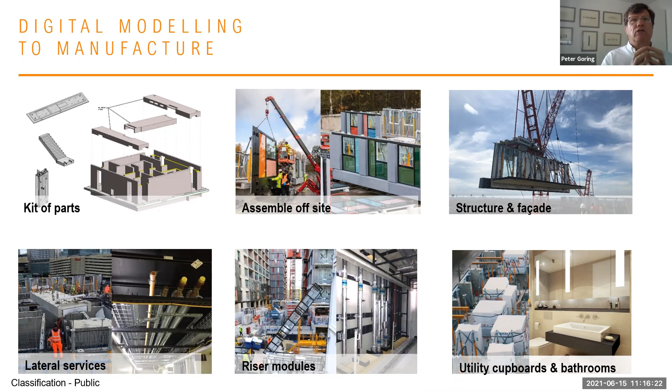So on the next slide, I just want to run through this, how we're doing it. We're actually not having a factory for this. We're actually piggybacking on other people's factories. Many people have invested in some fantastic facilities and spent millions of pounds on it. Our approach is slightly different. We're trying to set up hubs and networks across the country where we use our existing supply chain and work with them to develop.

So what you see here is a precast yard in Norfolk. The precaster owns the yard. They manufacture our materials for us. They put them at the back of the site, underneath the rail. We've actually invested in the crane, so small investment, and we take the units from what we call our supermarket, we bring them forward into a little assembly area, and working from back to front, we bring the precast forward, we put the facade on it, and then we ship it to site.

We have a target date a little bit quicker than that to give us an 18-week benefit.

Our productivity on site is outstanding. Traditionally, you would expect it to be around about £60 per man hour, that's gross value added. We've actually been achieving up to 170 on site. The main reason for that is the amount of resources we've reduced.

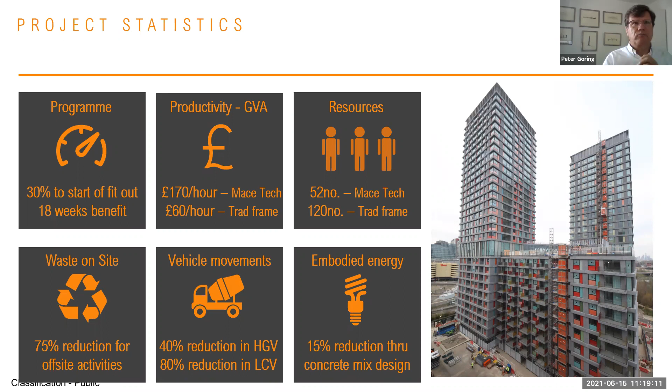So what we've found as we've been delivering these sort of projects over the last 4 to 5 years is that the key to it has been off-site manufacture. But the current demand is moving towards a low carbon environment, and that's certainly taken a lot of an increase in the last 2 to 3 years, in the last year. So on the next slide, I want to look at what we're doing and how we're developing that, and how can we look at addressing the embodied carbon through construction.

So it's a bit of a busy slide, I apologise for that, but effectively, where can we influence?

As Mace, in 2021 we achieved net zero on our activities. Net zero on our activities means the operations on site - the way the tower cranes work, the way the construction site is run. We don't allow diesel generators on our sites anymore, everything is electrically powered. We've managed to cut down from 26,000 tonnes of carbon that we had as a business in 2019.

Reduced it to just under 13,000 last year. We've offset the rest, and we're working hard to try and get to the point where we're minimum carbon on site. Through our clients - what we call our clients' carbon, the client's designs - there's about 150,000 tonnes of carbon.

We've set targets to reduce that 10% year on year, and we can do that by looking at the design in different stages. The earlier we get involved, the more we can influence. And the more we can look at our processes, the more we can influence it as well.

So on the next slide, I just want to show what we're doing with materiality alone.

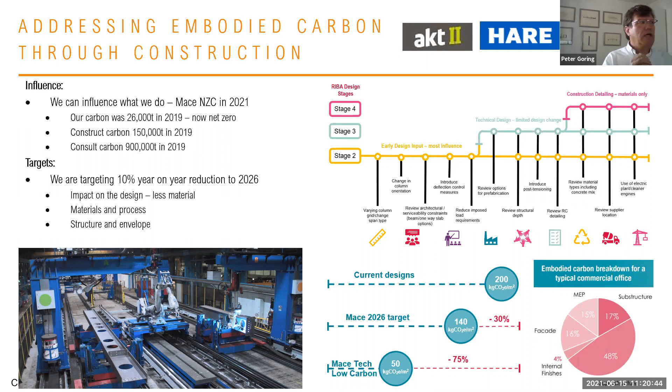If we can reduce the cement content straight away - in concrete terms, I could talk about concrete for hours, I won't do that - we can actually take the cement out of the concrete. The load cycle means it's less critical on the turnaround time, and therefore we can start to make good inroads into it.

On steel production, there are two types of steel. The basic oxygen furnace has 80% more embodied carbon in it than the electric arc furnace steel. So if we can target higher strength steel to be more effective, and design not just for load but more for deflection, vibration, and now carbon, we can get a much lower carbon structure.

So effectively, what we're trying to do as a business - we've identified that in a structure, in the structural floor plate, there's around 200 kgs of CO2 per square metre. We're targeting 10% year on year, so we're hoping to get that down to about 140 by 2026.

We've also developed, with funding from Innovate UK, with Cemfree and Oranmore Precast amongst the partners, as well as Hare and AKT II, a method of doing off-site cassettes, which is what you see in the foreground there. What we've tried to do here is get low cement carbon, which can actually achieve the same as an ordinary concrete structure.

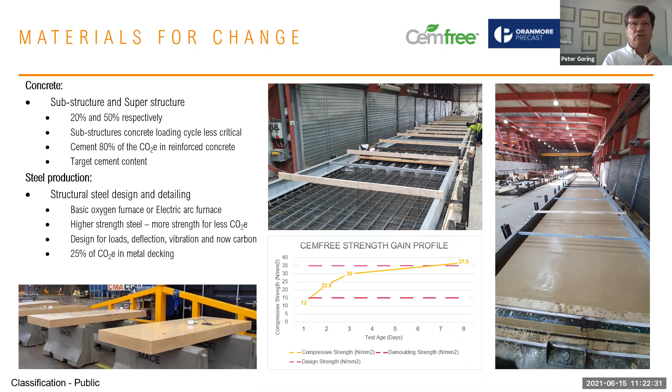We've reduced the carbon on this from 200 down to just over 50. So already we're taking 75% of the carbon out of the superstructure plates and moving to a different low carbon situation. So the idea behind all of this is, how do we actually achieve this with a view to taking the carbon down into a very low building, and convincing the clients we're doing the right sort of thing.

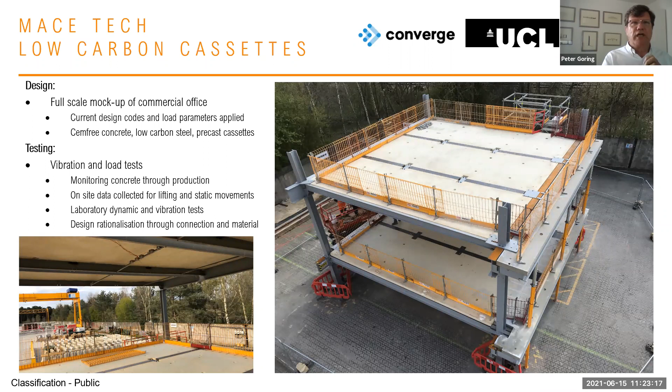So just one last slide from me is how we take this change from being an idea right the way through to commercially available. Effectively, where we are with the Innovate UK project, we're doing the factory tests and the proof of concept. The next steps will be whole project tests.

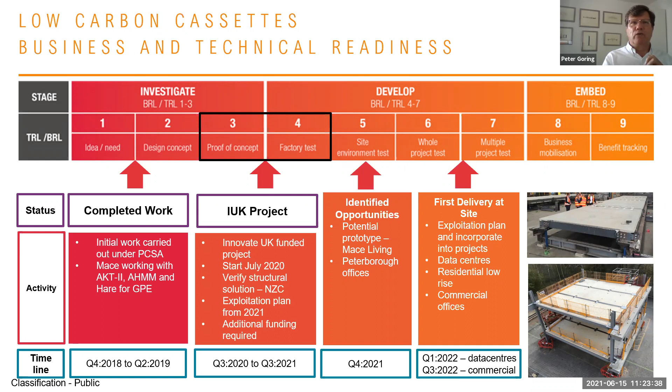This is the area that Yewande mentioned earlier about how you can actually lose a bit of margin on this, because our margin's really low. But once we've dealt with all this, we can then move on and roll it out to the business. So it's a really exciting time, as Yewande mentioned, and I'll hand you back to her for the next speaker.

So the HIPER Pile is an amalgamation of individual innovations which, when combined, offer unprecedented savings in embodied and emitted carbon, an improvement in quality, an improvement in safety, and provides the innovation to reduce material volume and waste, as well as speeding the overall construction programme. It's worth noting that not all elements have to be adopted, and a number of these innovations can be delivered in isolation. The product is subject to 5 patents pending, and we also exclusively license the HIPER Pile IP from City University of London. So what does the HIPER Pile stand for?

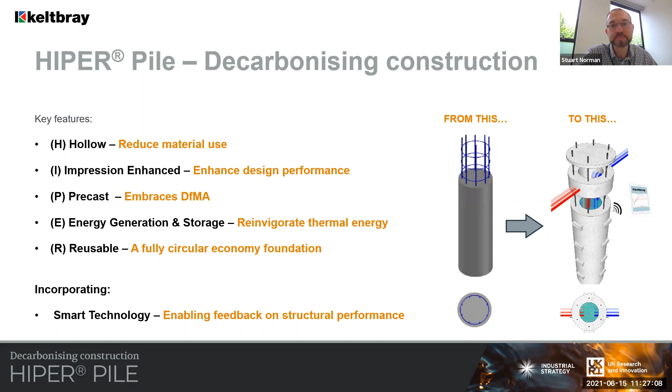So the hollow and the reusable elements tend to go hand in hand, but primarily the hollow pile can either be a cast in situ or a precast foundation, which we'll come to shortly. For the cast in situ version, you can see in the middle picture, we use a very thin steel liner to form the void, with a 200mm concrete annulus formed around the outside.

Why do we do this? Well, obviously to save material volume and carbon, but it's really to better match the geotechnical and the structural performance of the piles that we install. Typically, piles have nowhere near the structural stress that they're designed for because of limitations due to the geotechnical performance. So this provides us with between a 30 and 70% concrete saving by volume, depending on the diameter that we're comparing it against.

Larger diameters do give greater savings. Where we're moving with this is that we're aiming to adopt large diameter monopiles, so try to move away from multiple pile caps so that we can eliminate the pile cap construction and also the embodied carbon associated with the pile cap as well. The void itself permits inspection during operation so that we can warrant and reuse the pile for the next occupants.

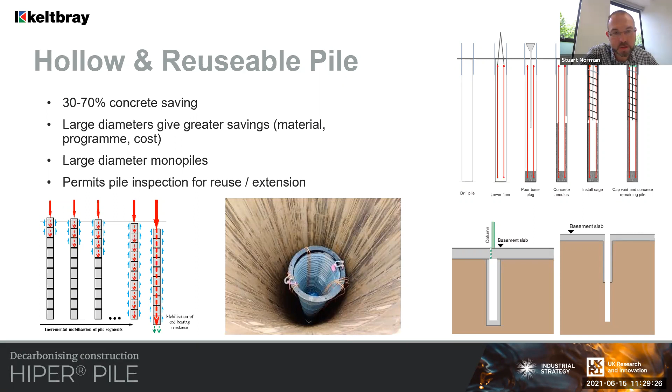The hollow pile also has an added benefit in that we're better able to match the stiffness of the pile to the stiffness of the ground. What does that mean? That means we're better able to further improve the shaft friction performance of this hollow pile element. Next slide, please.

So the impression pile element. If you take yourselves back to your childhoods, playing with a lump of clay in a clay pot, you put your thumb in and you just displace the clay and form a nice little impression.

Effectively that's what we're doing in those bottom right hand photos. We are remodeling the clay to give enhanced shaft friction. How do we do that? We're effectively moving the interface away from a concrete-to-soil interface to a soil-to-soil interface, and by doing that we enhance shaft friction by between 30 and 40%.

What does that mean for the layman? It means that wherever we design a 750mm diameter pile, it's more often performing as a 930mm diameter pile, but without the material and embodied carbon that goes with that. So we're able to reduce material volume by around 15%, and sometimes, depending on ground conditions, we're also able to avoid going into water-bearing strata, which adds significant time and cost.

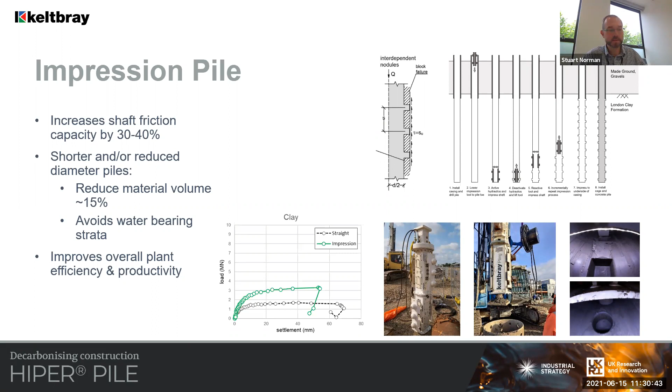So the precast pile embraces DfMA in deep foundations. There's a little snippet there of the design of the element, overall to improve construction quality. The main element is that rather than breaking piles down to their final cutoff level, we are intending on building them up to the final cutoff level.

So a bit like a Lego block, really. What does this do? It certainly improves health and safety because we are able to eliminate HAVS from the pile trimming works. The connection to the ground is formed through grouting of the thin annulus between the precast element and the ground itself.

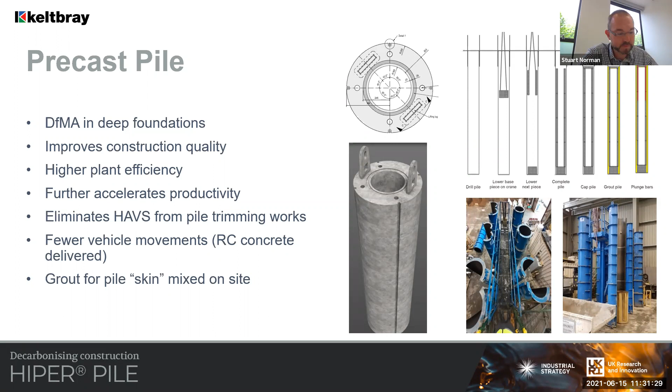So the energy pile: basically we're able to incorporate significantly higher thermal efficiencies because concrete is a poor conductor of heat, whereas water is a much better conductor of heat. So we fill the void with water and we're better able to provide much greater enhanced thermal performance.

We also solve a particular problem in that the majority of ground source heat loops are damaged during pile breakdown. So we completely avoid this by separating the piling construction activity from the thermal construction activity itself, thereby also improving overall productivity.

I won't labour this point too much, but we've done an analysis here: are net zero deep pile foundations realistic? If we allow 100% for what we do day to day, we've analysed a 900mm diameter pile in green and a 2.4 metre diameter pile in red. If we just replace a solid pile with either cement-free concrete or earth-friendly concrete, we're able to offer a 45% saving. As we introduce each element of the HIPER pile, we eventually get to either an 85% saving in embodied carbon or a 94% saving in embodied carbon.

Once we add in the operational savings associated with the use of the pile for thermal energy, which offers a coefficient of performance of 500%, it could conceivably be given that we are actually producing a carbon negative foundation, a first for the UK.

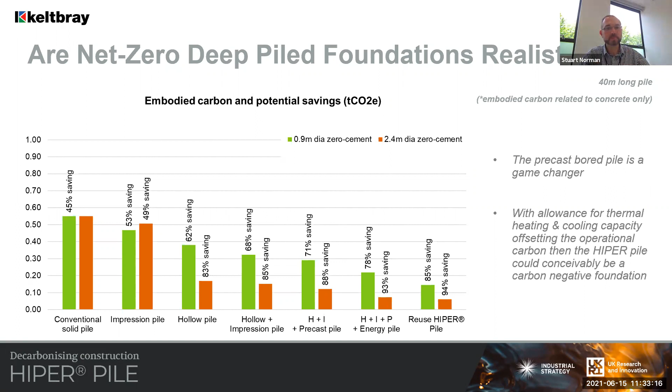So there's a summary of the benefits there. I'm running a little bit over time, so I won't run through those in any detail, but there are a number of indirect benefits associated as well as the direct benefits I've spoken about today, and I'd be pleased to field some questions much later on down the line. Thank you all for your attention.

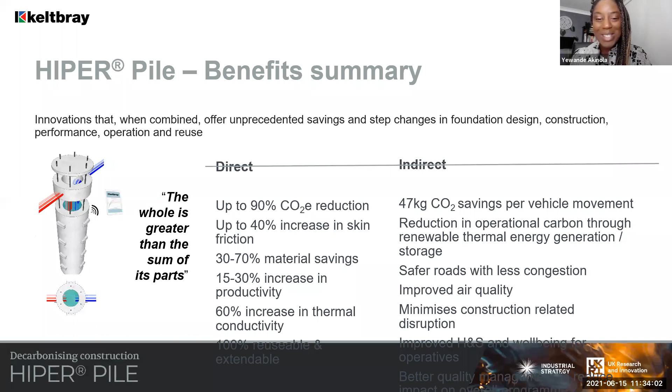It's a pleasure to introduce Ian Naylor. Ian, have we got you on? Hello, yep, here I am. Oh yes, fantastic, brilliant, nice to see you.

Ian is a chartered architect. He's also the lead of design research at DFE. He specializes in school building design and has worked on academies, free schools, PSBP, and the new school rebuilding program. He's currently the lead of the design research units in DFE, developing and ensuring standards of construction are set and met. His team has been meeting the challenge of climate change with a wide range of projects, including GenZero.

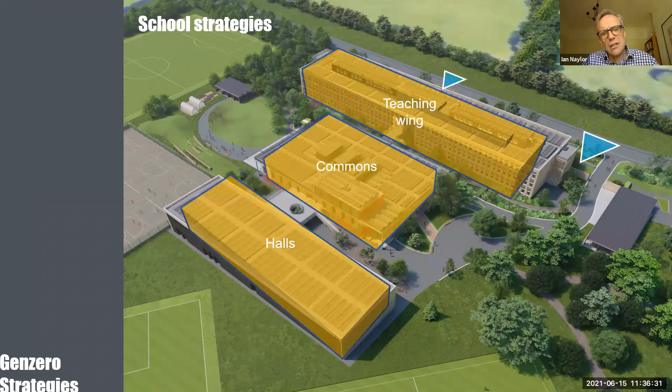So what have we done? We're looking at a secondary school - this is one of two models that we've created. You can see that we split the school into three parts, around two elements. One is around the type of spaces that go into each one - halls being very large spaces, and teaching rooms being classic cellular spaces. The commons is the sort of pastoral support, dining rooms, IT spaces and libraries in the middle.

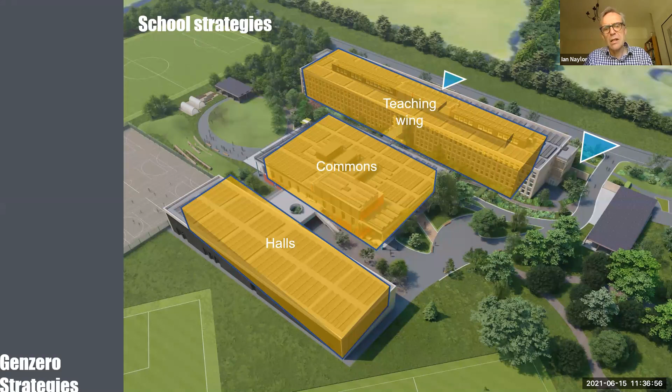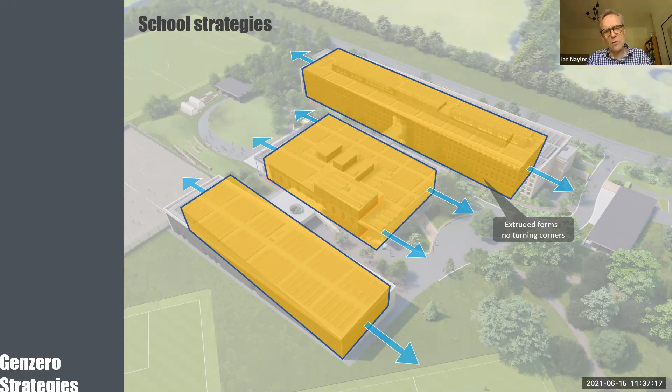We've got lots of different elements of why this is so good, but one of the things this does is it allows crossflow ventilation, which is captured in our new specification for schools S21, and it's critical to the way that we heat scavenge and energy scavenge later on in the design.

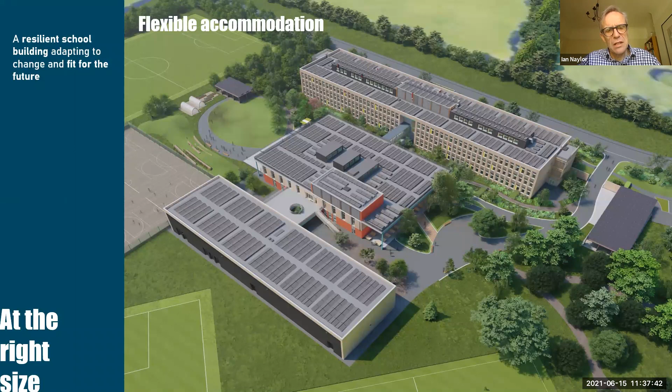Right, the standardization piece. What we've done is we've split the building - you can see green halls, orange are cellular teaching spaces, and the grey is the support spaces.

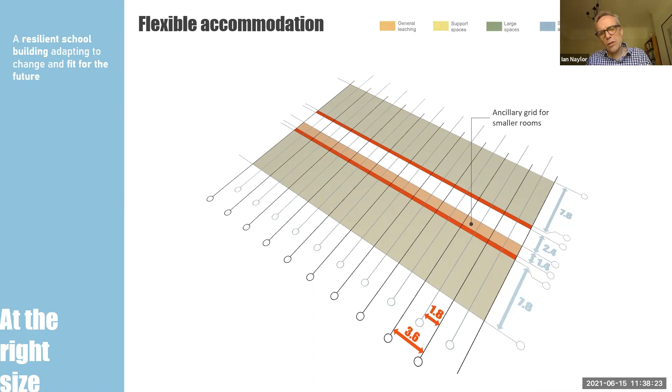This is a little click sequence of slides. You can see we've set the building up around a standard grid - just looking at this little grey bit, it's around a 3.6 grid, common to both the panelised system. It's a classic old 3.6 and 7.2 classical grid for steelwork, but it's at core as well. It fits around volumetric, and this building concentrates on both a combined panelised and volumetric solution - panelised for the simple spaces and volumetric for the spaces that we want to fit out very much off site. There's an ancillary grid for small rooms.

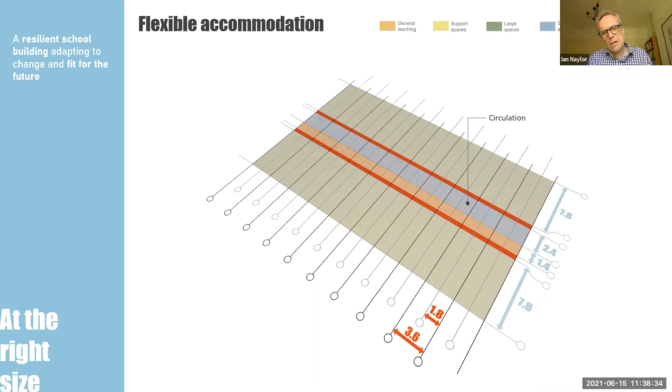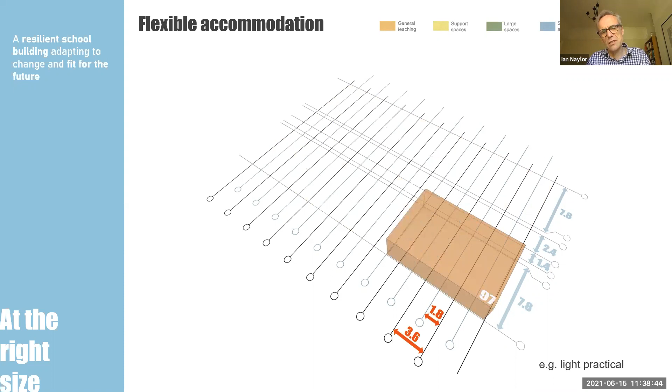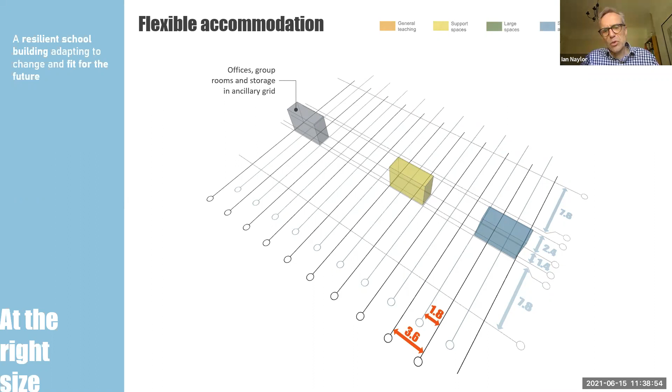Circulation is at 2.4 in line with the new S21. We've allowed ourselves in that ancillary grid to form voids for cross-vent - 55 for a standard classroom, 69 for an IT room, 83 for a laboratory, 97 and 111 for those big specialist spaces. That ancillary grid works really hard for support spaces, offices, and so on, and to provide that ventilation through the building.

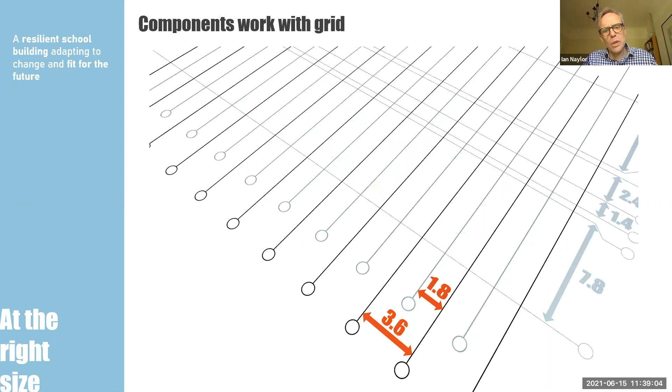There you can see it blocked out as a standard block and blocked out as a DT suite as well. Let's just watch the way this builds up. What we're really proud about there - you can just see the composite concrete and timber panels coming in for the floors. This is a CLT fabricated external panel structurally.

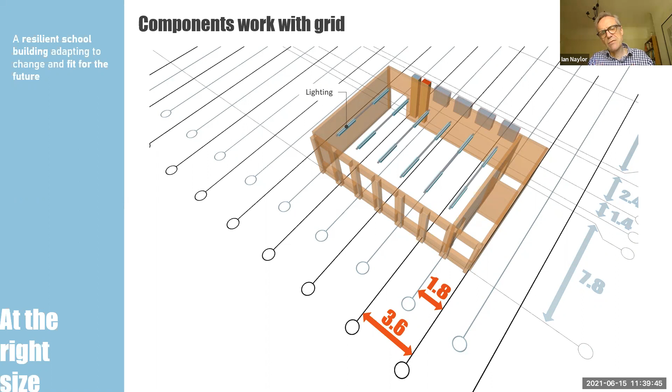You can see that the cross walls, because we've used a line loaded system, can fit anywhere onto that 1.8 grid - that's how we get a classroom or a laboratory. We've created a service spine, really unique - we've shifted away from organising our structures into a volumetrically almost pre-constructed element for services in that vertical element. Even the lighting fits on the grid, so we can dissect these spaces very simply.

That gives you a sense of yellow being the panelised elements of the building, red being volumetric plant rooms, volumetric kitchens, volumetric toilets, and staircases of pre-assembled elements. Next slide, please.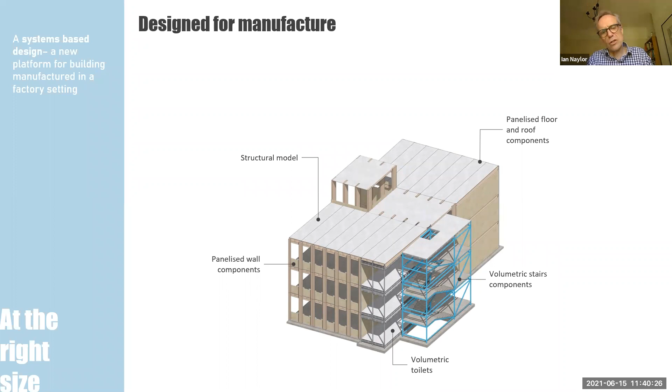And timber, CLT, and glue laminated structure. This shows that the structure is largely timber. You can see the volumetric panels, which come in red, volumetric units coming in red. So here we are, we'll disassemble this and watch the way it goes in. There are those composite floor panels we're really proud of, and there's a volumetric unit coming in and being clad.

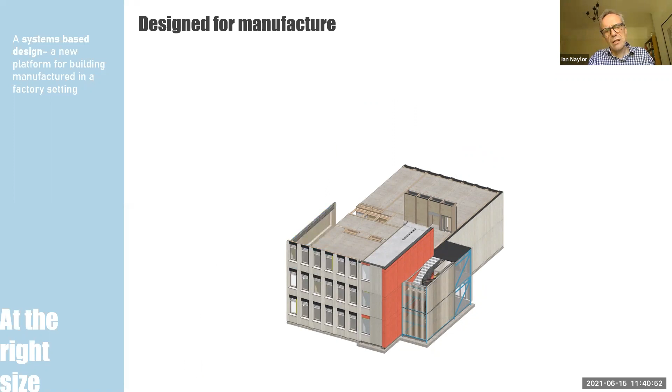There's the service spine coming in, pre-assembled and fitted out. The external wall coming in as a structural system with its windows, and then the capping pieces going on afterwards. The walls going in with their dado and frieze already on, roof going in, finished on site. You'll see the PV panels dropping in.

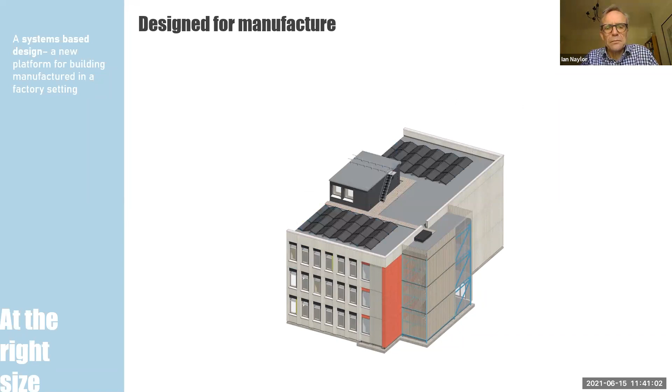Keep going. And then the furniture, all designed in a moment. You'll see the furniture going into the building. We've moved away from fixed furniture to loose furniture just about everywhere in the building. And you'll see, there we are.

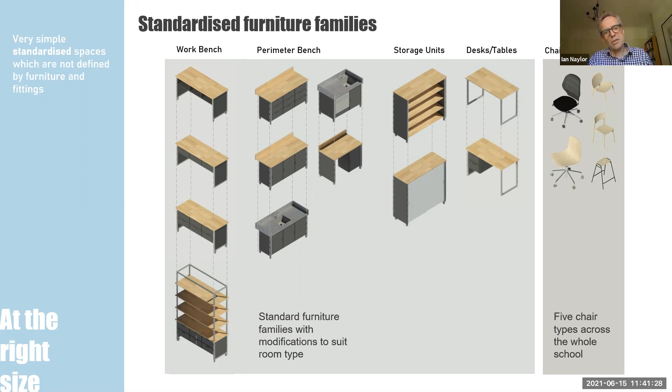We set the furniture up as a series of families. It's virtually largely on wheels, except for the tables, and even the sink units are plugged in, not scribed and fitted to the building. We've managed to get chairs down to just 5 types in the building - a real achievement, great success. Next slide, please.

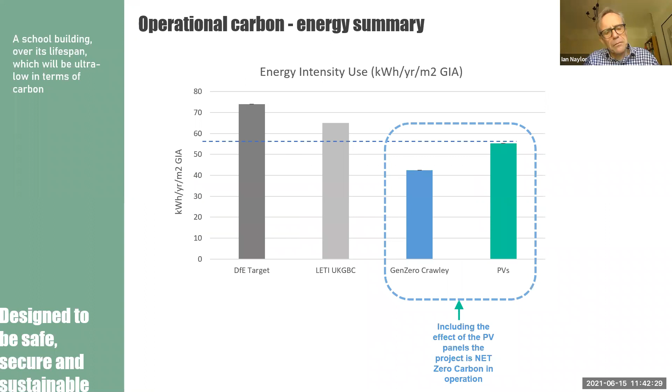Here we are on operational carbon, and you can see the various targets. You can see where we achieve GenZero on our Crawley site in blue, and the output of our PVs across an annualized period - we're comfortably net zero on operational carbon. Thank you. Next slide, please.

And I said I'd talk very briefly about what makes a great building. You can see one thing we struck early on: a CLT manufactured halls block, all uniform spaces. We've made them all spanned with glue laminated timber, but without a frame - it's a box structure in its own right. Next slide, please.

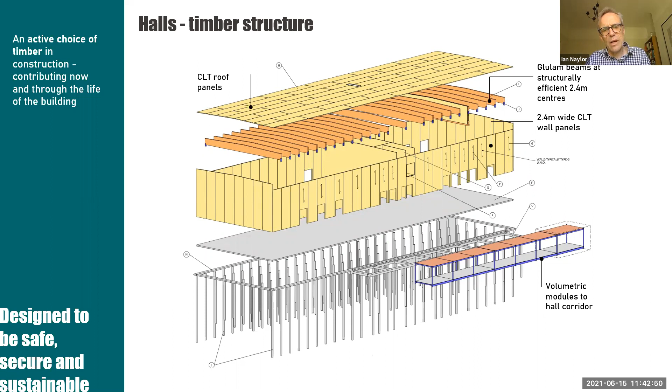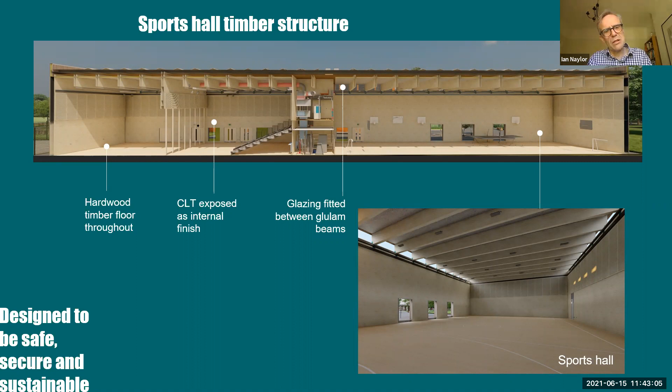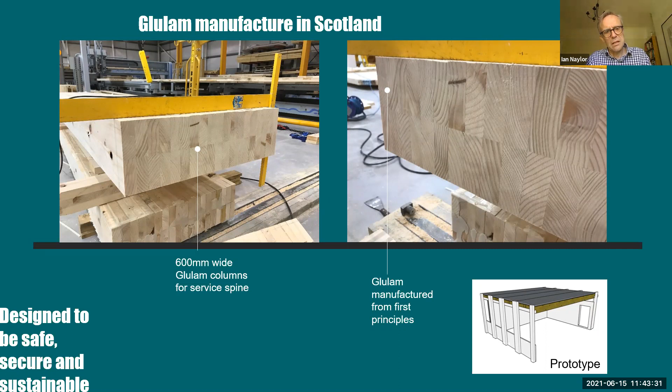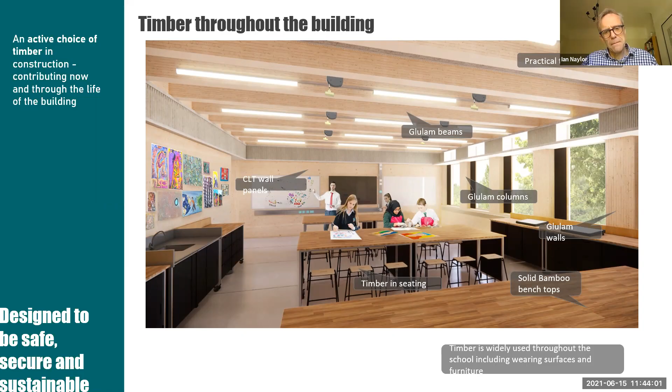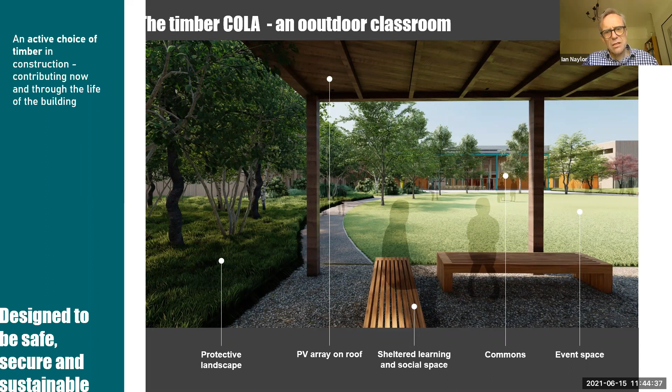Outdoor classrooms. We've got a PV array on most of the building, including on the outdoor classrooms and on the bin stores, which I think is another great achievement. Outdoor classrooms, even those constructed in timber - this is about embracing a whole life position.

The final slide, hopefully. Thank you very much.

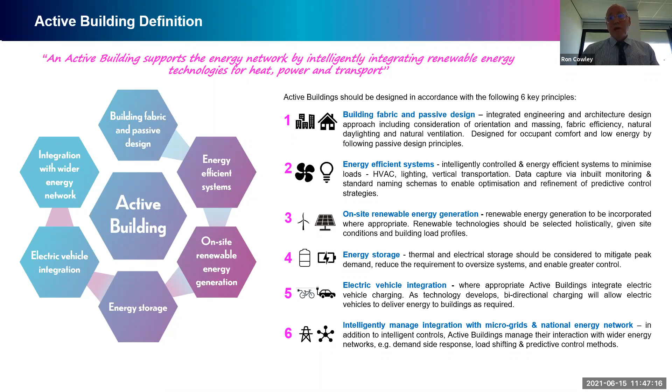So a home is a power station, ultimately. And what is net carbon zero? Net carbon zero for me is when we can provide the heat and energy that satisfies the occupancy demands whilst being disconnected from the mains electricity and gas. That's ultimately what operational net carbon zero is - when we can disconnect the home from the mains, electric and gas.

However, the main problem is, how do we get our building through the winter months? There's an awful lot of energy available in the summer months to generate power and to store that. And how do we store that energy and release it through winter? So that's the key - one of the key strategies of the Active Building Centre is to demonstrate how we can balance the heat and energy load interseasonally. We call this interseasonal heat and energy balance.

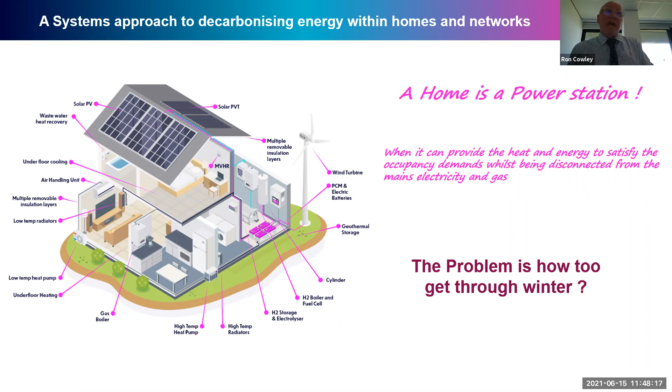Okay, so for me, the compelling part of an active building is - do you put food on somebody's table, or do you put energy in the meter? The net carbon zero challenge identifies the key thing - there's a lot of fuel poverty out there, and people can't afford to eat or run the home as well. So having buildings that can generate an income for the occupancy is a great thing. So, the Active Building Centre - what are we?

We are a centre of excellence whose mission is to promote the improved understanding and increased commercialisation of low carbon construction and renewable technologies for energy capture, storage, integration and distribution within and between buildings through adapting, adopting, improving and developing cutting edge technologies which simply connect, control and integrate building energy solutions within intelligent network systems. So ABC's aim is to revolutionize the way in which buildings are powered and heated to accelerate the UK's drive towards net carbon zero.

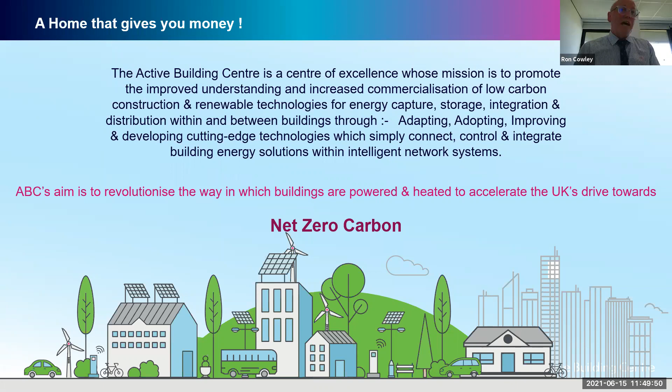So the 3 C's, I call it: we capture and store energy, we connect all the elements together and control it, and we configure it.

Part of an active building is to connect all the elements together, and we look at the energy systems, connect them together with the occupancy, a product selector, and create a digital twin of the building and the community so we can learn from how the building works with the occupancy in the building fabric to optimize the energy flows.

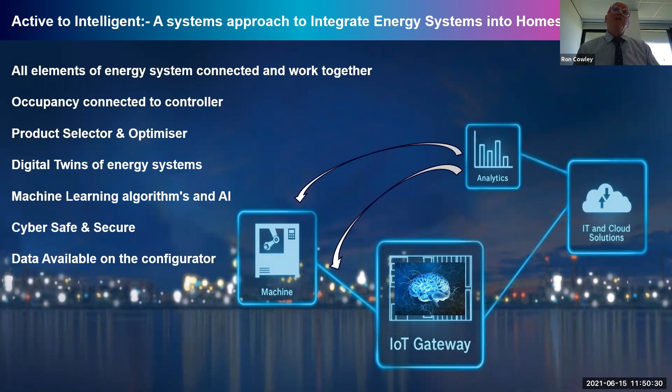And finally, we are producing a configurator, giving this information to everybody who wishes to know how to have a journey to net carbon zero in a building or community through actual worked examples. Thank you very much.

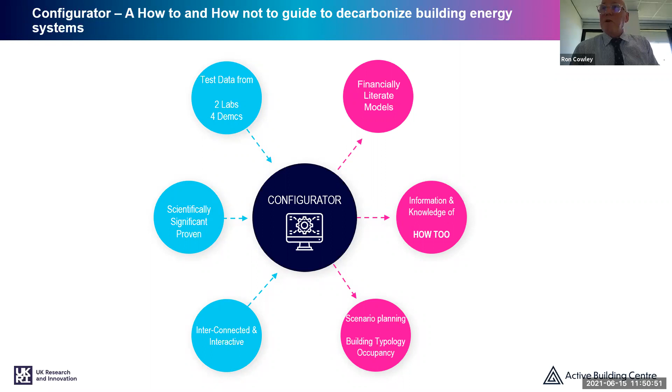Thank you very much, Ron, for that. Really useful. I'm looking at that configurator and thinking that would be extremely instrumental in our industry. Very, very important. It's the key. It's very, very important. Yes.

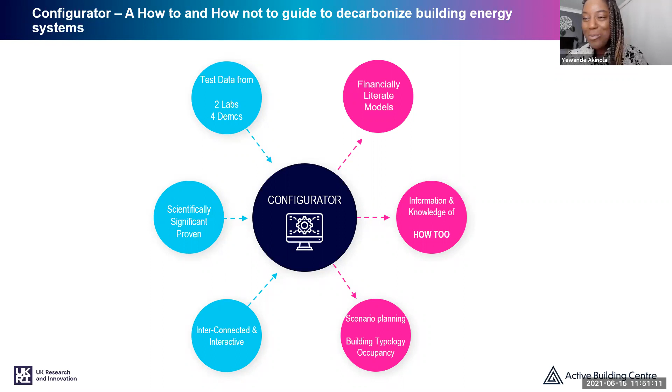It's a real pleasure to introduce Ian Hutchcroft. I can see him. Oh, fantastic. He's on my screen now. Brilliant. Ian is part of the Energiesprong team adapting the Dutch developed approach for the UK market, working closely with teams all over the world. And the approach, I'm sure we'll hear about it, but it's really an approach to deliver zero carbon retrofit and new build homes. Thank you very much, Ian, for joining us. Thank you very much. Thank you.

Energiesprong means energy leap in Dutch. It's the name given to the Dutch government strategy for delivering zero carbon homes, particularly retrofits, but also it works for new build. It's a strategy for delivering zero carbon retrofit of existing housing stocks at scale, quickly.

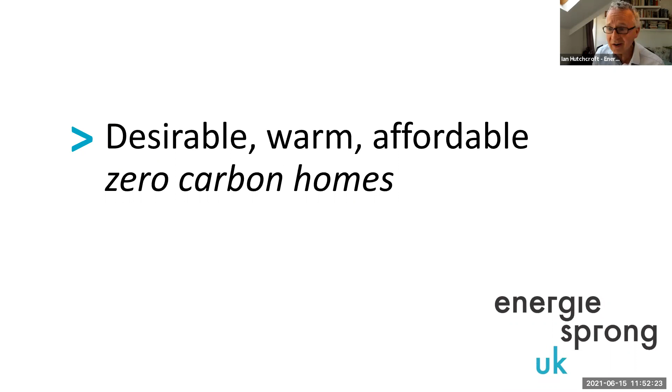Our role in Energiesprong UK is to take that successful Dutch experience and translate it into the UK market, which we've done, demonstrate that it works, which we've done, and scale up a market and an industry to deliver this, which we are in the course of doing. We're 100% publicly funded. We're not delivering retrofit, we're a catalyst organisation, market development organisation, funded by EU, UK and UK local government sources.

So let's recap. We've got a big job here. We have 27 million homes, and they all have to be zero carbon within the next decade or two. The retrofit we've done to date isn't the way we're going to achieve that goal in the future. There are things missing: we don't have a business model for doing home retrofit by and large, we don't have a way of financing retrofit, the cost is too high at the moment to get to zero carbon, and demand—well, who really wants this done to their homes? Scale is a real issue; being able to deliver thousands of retrofits daily across the UK is a challenge currently. And there is a performance gap between the design and modelled approach and what it actually performs in the real world.

The Energiesprong approach recognises that we need a whole house approach, as many people do, but we also need a whole system strategy to get this done. The Energiesprong strategy provides a business model to finance the cost of the works from savings. It reduces cost through industrialisation and aggregating demand, scaling up volume through economies of scale. It produces homes that are a joy to live in, that look great, on a really simple offer to homeowners. It answers the demand issue. By using industrialisation and aggregating that demand, this is deliverable at scale, and it answers the performance gap by requiring verified monitoring of actual performance every day, every year, with that performance guaranteed by the solution provider that has delivered the work.

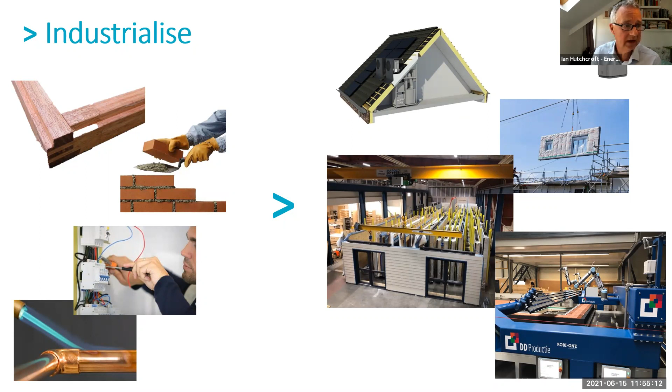The second important element of the Energiesprong strategy is the business case that pays for it. We're using social housing as the launching market—it's big enough to bring scale on which an industry can evolve around supplying. In the traditional social housing context, the resident pays the landlord their rent, and they pay their utility company their energy bill. In the Energiesprong world, they still pay rent, but they pay an additional charge, a proportion of what was their energy bill, but is now an energy bill saving.

A proportion of that is paid to their landlord as a comfort plan charge. The resident receives guaranteed comfort for a guaranteed low total price, less than they were paying before. There's still a residual electricity bill, electric only, no gas, and that goes to the utility. The resident can still switch as before, but that additional income is used by the landlord together with savings from their planned maintenance programme to finance a business model that pays for the capital cost over the long term.

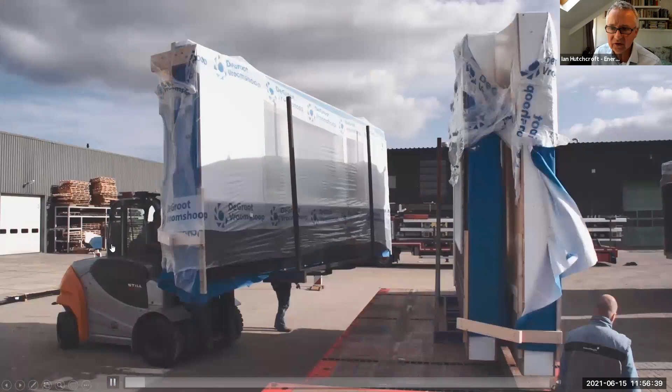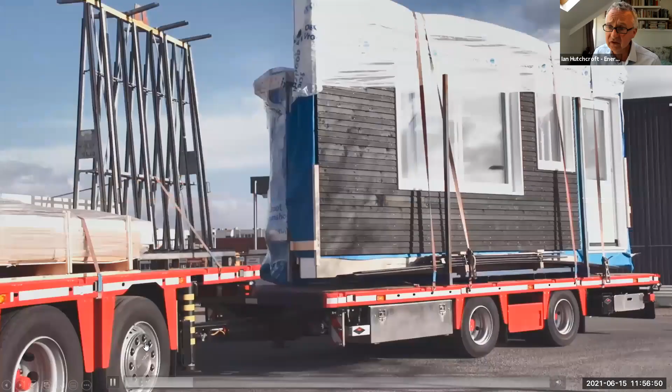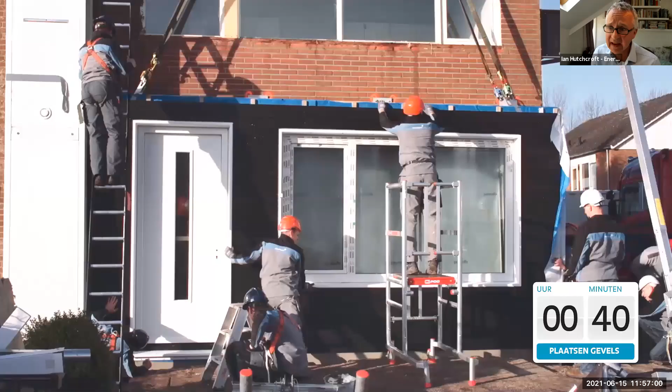Quick video of what it can look like if you run this. Hope this will work for you—it could be a bit jerky, but this is a Dutch company back in 2018 doing zero carbon retrofit in one day on site. They've 3D laser measured the property beforehand. In this case, they're attaching brackets to the front—it's a nice strong wall—and they're going to hang these factory made panels off it. That was an energy module flying in, a quick simple job to connect the heat pump and other bits and pieces into existing plumbing and electrics.

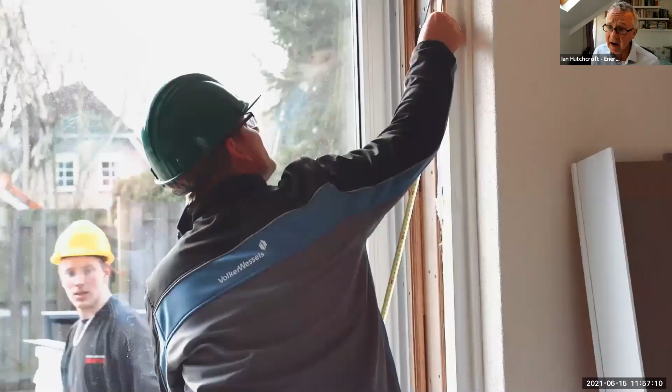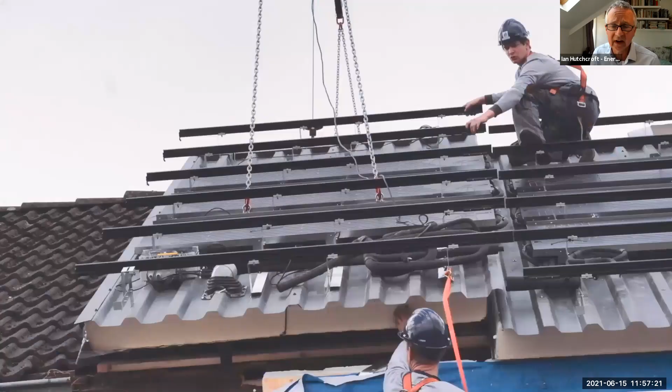There's ventilation equipment in there as well. Their factory made panels have triple glazed windows and doors already fitted. The only internal work is a quick new reveal system around the windows. For the roof, all they've done is taken the slates off to reduce the load, and a lightweight roof is going in with the rails already fitted for the PV.

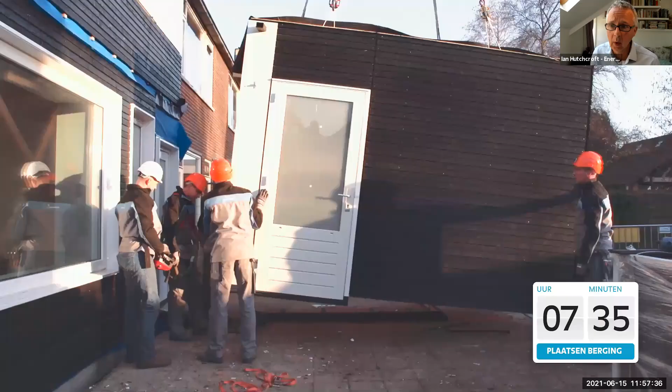Extra accommodation is being provided in this property—in this case, a ground floor wet room, disability-proofing the property. It's an example of how MMC can make it possible to increase the volume of the property, put stories on top, put extensions out the back. You come home from work at the end of the day and your house has been transformed. It looks better than a new build home, and it's guaranteed to be warm and comfortable every day for a guaranteed low, affordable total energy cost.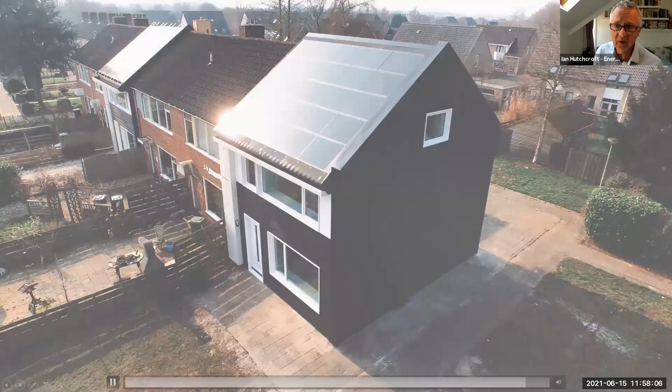And you extrapolate that out to the whole terrace and the whole neighbourhood, and what you've got is regenerated communities paid for by energy and maintenance bill savings delivered by the retrofit. So that's what Energiesprong can look like.

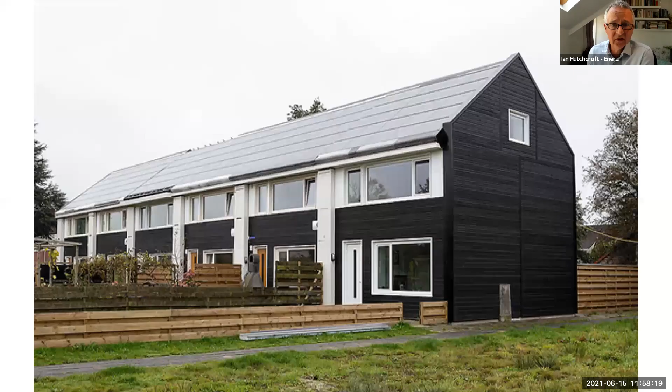Let's just whiz through a few of these. That's the same archetype, same company, rolled out—that's a semi with the energy module, not quite so quick, in the porch. These are street scale, estate scale properties scaled up that have been retrofitted, with lots of different looks and feel.

Non-traditional property with accommodation added on top and underneath here, as well as net zero retrofit. The residents chose the colours here—lots of positive ways to engage the residents. It works for flats, and it works for high rise too, a bit more difficult to get to net zero, but it can be done affordably, with grid friendly electrification.

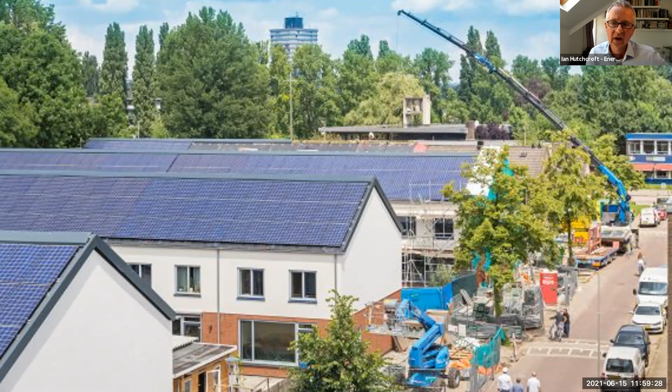And it works for new build too. What we're aiming for is being able to deliver at scale—an industry that can go street by street by street without decanting anybody, with quick installs leading to net zero.

First project in the UK was in Nottingham, delivered by Melius Homes for Nottingham City Homes. Initially 10, now over 350 homes in contract and being delivered.

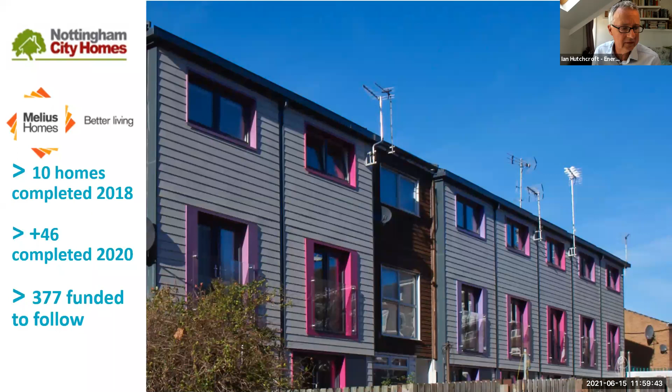Second project was in Maldon in Essex for Moat Housing Association, delivered by Engie—5 homes completed there back in 2019.

Third UK project was in Devon. Three social landlords came together, jointly procuring ModPods, part of the Midas group, to deliver initially 16 homes, and there is a further contract being signed shortly for an extension, an additional number of homes there.

So, a very quick summary of the three key elements of the Energiesprong approach. First, the client asks the market for a different product. You procure a design, build and long-term guarantee solution in one integrated contract against a high-level performance-based specification of net zero energy, meaning the property needs to consume as much electricity in the year as it produces. Sometimes it imports, sometimes it exports, but that drives the business model. There's a bundle of comfort, plug power, hot water and temperature for a guaranteed low energy cost for the resident, and guaranteed low maintenance cost long-term for the building owner. So what you get is an assured quality product, long-term performance guaranteed, no decanting of anybody. It's affordable because it's financed from those guaranteed savings, and it's desirable too because it looks good and feels good to the resident.

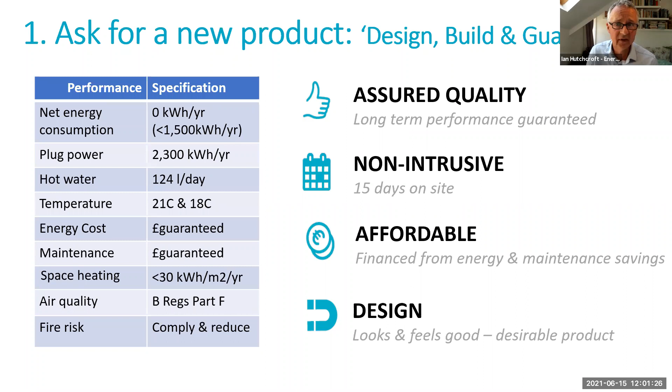Second key step is that this is an easy to understand product: guaranteed comfort every day for a fixed weekly or monthly cost.

And the third really important step is you can't build an industrialized sector of the economy off doing pilot projects. We have to build a long-term volume market in a really clear, guaranteed way for the supply chain to unlock investment in industrialization and innovation. So this is what we do as Energiesprong UK. We work with landlords to aggregate demand and bring that demand into the market. We work with supply chain companies to help them understand what they need to do to win contracts and to make it easier for them to invest in innovation. And we also work with government and policymakers to make the early market conditions right for landlords bringing volume in and for the supply chain too.

And the final thing we've just launched, you might have seen it in the press last week, the Mayor of London announced the launch of the Retrofit Accelerator Homes Innovation Partnership. This is a public procurement mechanism to allow social landlords to aggregate their demand, and we have over 2,500 homes committed to contract through this mechanism, for a panel of procured solution providers to go through a staged process of initially designing solutions for individual archetypes, prototyping them. If cost reduction and performance is met, go to the next bigger stage. If further cost reduction and performance is met, go to the next stage. Further cost reduction and performance met, you're at the economic price point where the savings cover the cost of the works, and you automatically go onto a framework that anybody can buy the solution from. So that's what we're working through over the next couple of years here in the UK.

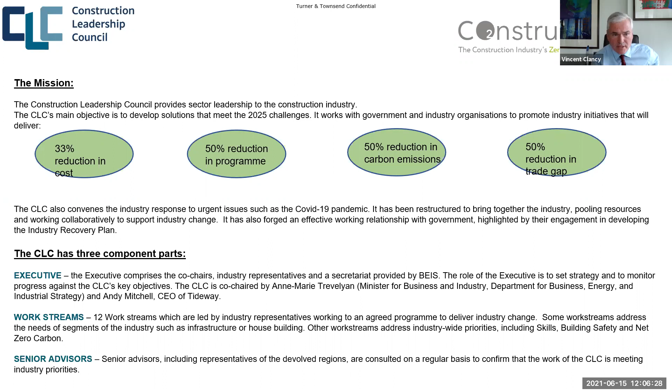Moving on to the next slide. In terms of Construction Zero, the aims - well, Construction Zero's role is not to develop new solutions, roadmaps, or new pathways. We've seen this morning that there's already an amazing amount of work going on across industry to move towards that net zero position.

But we do believe that the CLC has a critical role in bringing people together to consolidate collective actions for the sector. So the real goal of Construction Zero is to act as a convener for the industry, to bring the industry collectively forward, to remove roadblocks by working with government to see where we need to oil the wheels so that we can get rid of roadblocks so it happens quicker, and also to make it accessible to all in the industry.

We've seen some amazing examples of progress today, but we actually need to get the whole industry to be able to participate, and therefore we want to act as that convening force. So we're hoping to share solutions and set transparent goals. It's very much about a change management program to take all the good work and make sure it's embedded, and that we get the whole industry to adopt.

Moving on to the next slide. As part of the launch of Construction Zero, there's been 9 priorities set, and they go across 3 key areas: transport, buildings, and construction activity.

In terms of transport, the big area is to shift to zero emission vehicles and on-site plant. Secondly, we've heard a lot about it today - maximising the use of modern methods of construction. Thirdly, linking to that, champion the development of enough connectivity and access to low carbon electricity to enable that to take place. So 3 big areas around transport.

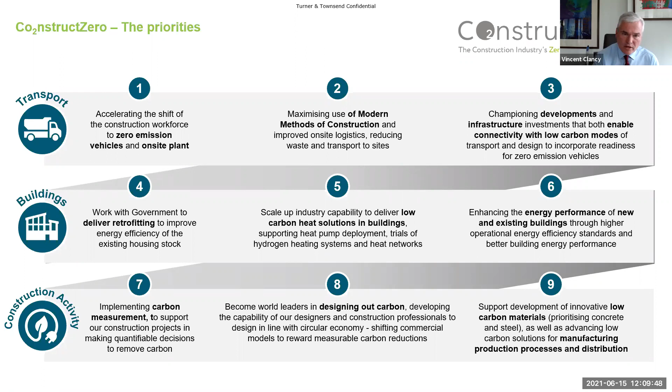Moving on to the next slide, we've got some key deliverables which we're going to hope to achieve by the end of June.

The first under performance measurement is that we're going to have a draft performance framework of milestones, metrics, and targets, and the processes by which industries and businesses will report. A lot of great work is going on, but it's very hard to see how much progress we're making. So the idea is we build a framework which allows us to see where we are on that path to net zero.

Secondly, there's a big push linked to COP26 to get businesses to sign up to the Race to Zero accreditation. Turner & Townsend, as an example, we've already signed. It's the government's chosen partner. And what we want to do is get as many construction businesses, design businesses and industry businesses to sign up to the Race to Zero and get that accreditation, because that gives everyone a route map for how they're going to move their businesses forward.

So a big campaign will be going on over the latter part of this month to encourage businesses to do that. Finally, in terms of signposting and support, we're building a web presence which will direct businesses to the relevant support in industry, particularly for SMEs - really, really important. This is a real challenge. I know in my own business it's taken us 2-3 years to get our head around how we're going to get to net zero. So for smaller businesses, we really want to provide resources to allow them to get the support they need to make the steps they need.

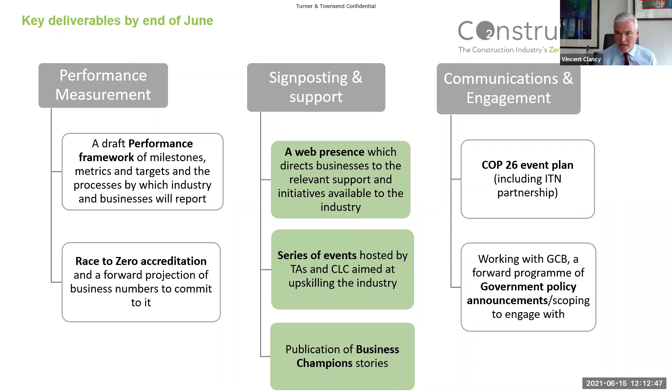So I whizzed through all of that because I was told I needed to try and catch up some time. But just to conclude by saying, really excited, a massive opportunity for the industry. The CLC isn't going to do it, but what it will do is act as a convener and work with government to remove roadblocks, but also work to help industry get access to what it needs so that we can all go on this journey.

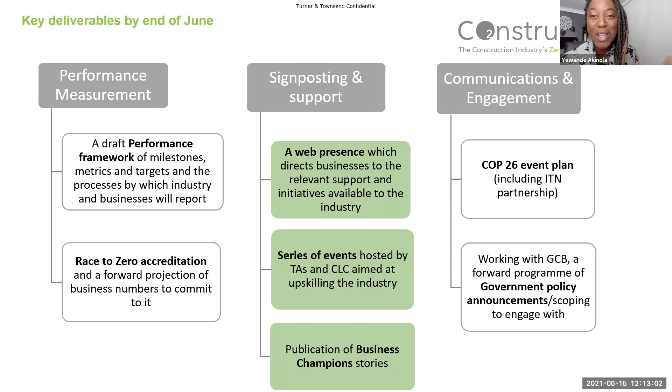Vincent, can I really quickly ask - and I think this is reflected in some of the questions that have come through - what is our thinking around skills and skills shortage potentially, and what needs to happen in terms of getting us to a place that we need to be in terms of ensuring that we have the right skills?

Yeah, no, absolutely. It's obviously a massive issue, and a lot of the work we're doing at the CLC, we've got a skills work stream, which I referenced, and absolutely we're working with government around a green skills agenda. So how do we produce the skills that are fit for the future? You've heard today about so much shifting - we haven't talked about digital much actually, but there's a huge digital shift around how we're going to use digital in the future to enable modern methods of construction itself.

We've got the retrofit program, which is an amazing opportunity to generate jobs, and very much part of the government's 10-point plan around transitioning to green skills. So absolutely at the heart of the CO2nstructZero program and at the heart of the government's view on this is that we've got to not only create the solution, but create the skills that will enable us to deliver that. And at the heart of that is better jobs as well. There's a real opportunity here to give the industry access to a whole new layer of participation, but also to create better jobs, better paid jobs, and more sustainable jobs, and create an industry that's been very short term and give it a much longer term focus.